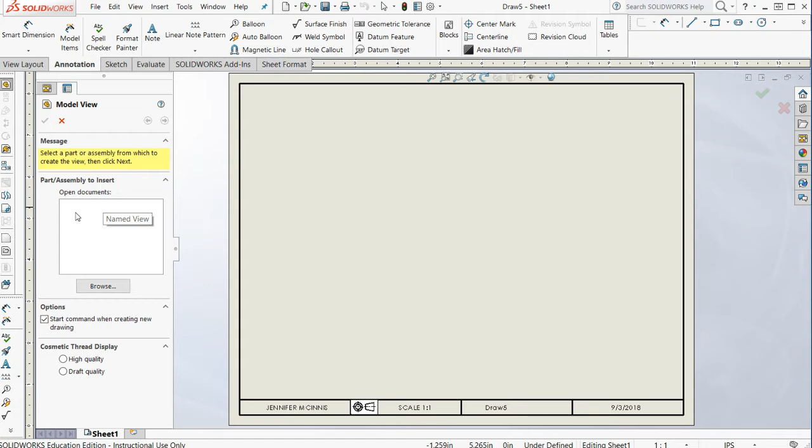It's an older sheet format, so it has my third angle projection note, but otherwise it's a pretty standard drawing template. So if you have your bearing part open, because you're doing this right after you finish the model, that would be in this window right here. If not, I'm going to browse, and I'm going to go find my bearing plate, and now I can put in these drawing views. So I'm going to put in my front view and a right side view, and I'm in projection mode, so I'm already going to just add in an isometric view at the same time.

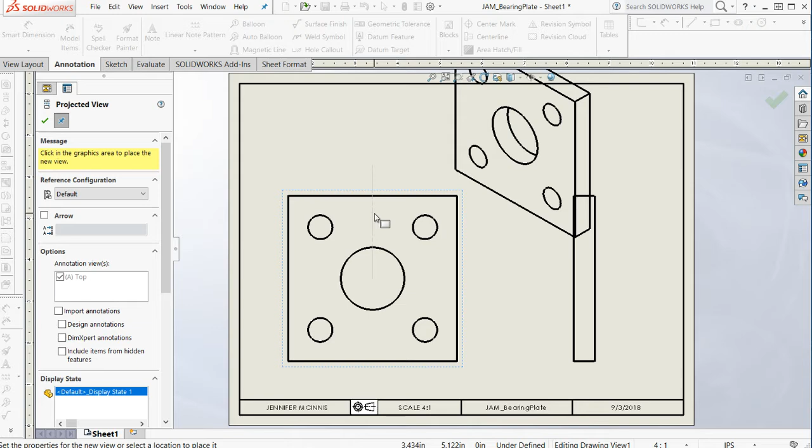Now the top view and the right view are nearly identical. They do not provide different information, so I'm not going to put in both. I'm just going to choose one of the secondary views. Check mark puts it in, or escape key finishes the tool, and I'm going to first off change my views. So this view is all right. It's a little big, but I think I'll have room for my dimensions, so I'll leave it. It's a scale of 4:1, so that should be okay. 2:1 is probably sufficient here as well. So that is up to you. There's no hard and fast rule about the scaling as long as it fits on the page.

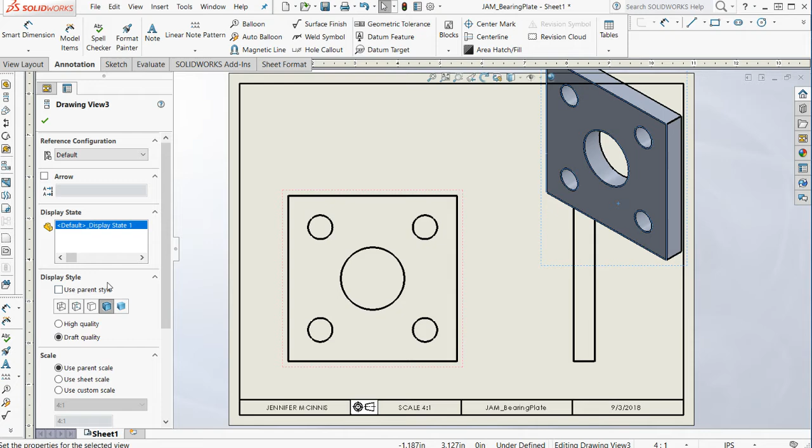This should be half of the scale of the front view. So I'm going to turn on shaded with edges on the left side. I selected the drawing view, and then these tools come up. I'm also going to use a custom scale and select 2:1 to shrink that drawing view to half size. Check mark closes those tools. And this just wants to settle right in that upper right hand corner. I notice there are no hidden lines to expect in this front view, but I should be able to see the through holes in my right view.

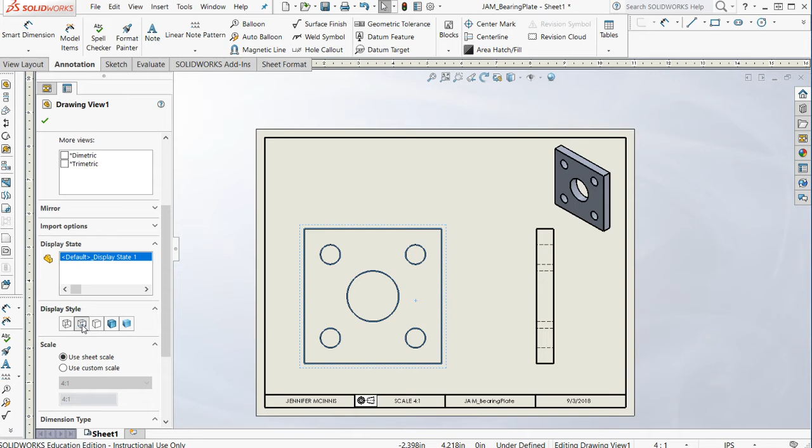So now I'll show you two things. So if my front view, which is the parent view, it's the first view I inserted, is the correct view, all of my drawing views will have that view. It should be a display style of hidden lines visible, not wireframe, because that makes all the hidden lines look like visible lines. But I want to be able to see where there are edges through the part. So this is showing me the holes, the edges of the holes, right?

Okay, so when I do a drawing, I have several steps. My first step is get the drawing view in. Seems intuitive, right? My second step is usually to add annotations that are not dimensions. So here I mean center lines, center marks, anything like that. So I'm going to start with my center mark, and I will highlight an issue we have because of our scale. SolidWorks scales center marks along with drawing views, which is, I think it might be my absolute top gripe about SolidWorks, is that center marks should not scale. I've never understood this one, so I will show you how we fix it.

When we turn on the center mark tool, all of these options come up. You have separate slot center mark options, you have manual insert options. I want to do a circular center mark because these are on a circular bolt hole pattern. So if I choose the circular option, I choose my holes in a circular manner, then my center mark is a circular one that indicates that bolt hole circle. I have to, however, turn off document defaults and divide by the scale. So I'm going to divide by 4 because my scale is 4:1, and that is a proper center mark.

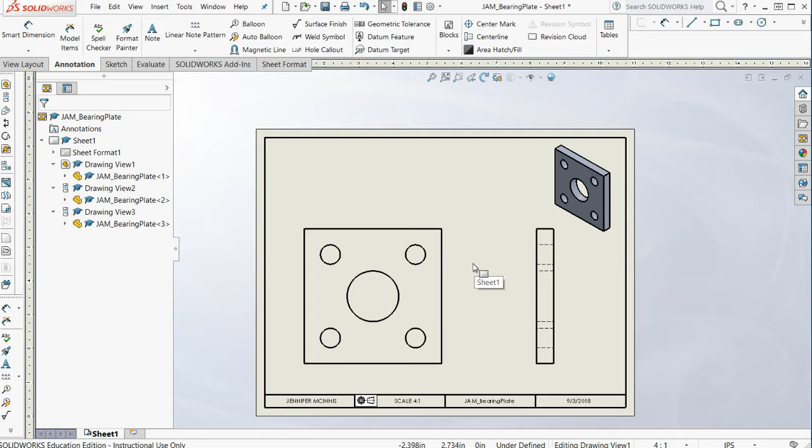Like I said, I don't know why. Oops, I forgot to hit check mark. Check mark puts it in, not escape. So let's do this one more time. Circular, around the circle we go.

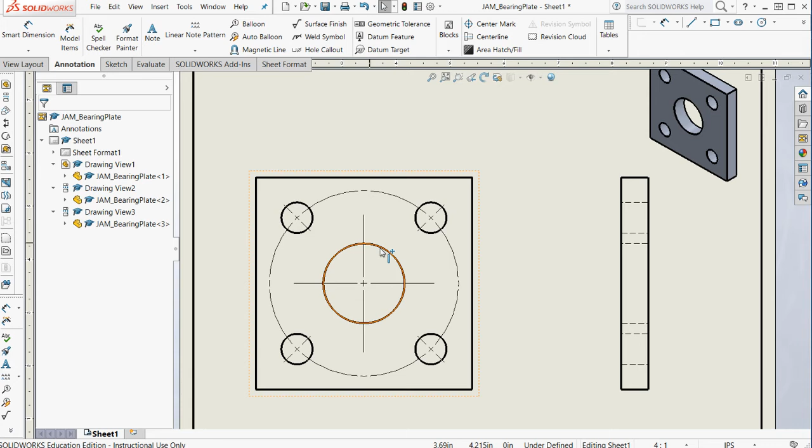And we turn off document defaults and we divide by 4. Check mark puts it in. So those center marks should be, I think it's 1/8 of an inch side to side or a 1/16 from the center out, and it should not scale with the drawing view. So that's our center marks. You'll notice it also included the center circle, which is perfect.

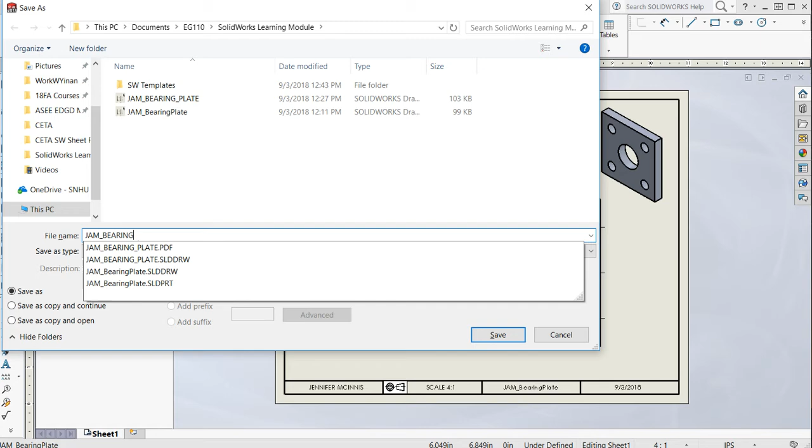And now I'm going to add center lines on these holes. I choose select view. I click on that view, and there are my center lines. Check mark puts it in. So now I'm going to give this a quick save. I already have one going, so we're going to do this bearing plate 2. Oops. I highly recommend all caps here. It updates down here, which is perfect.

Okay, so all of my annotations are in. It is time for dimensions. So let's look at a couple of ways we dimension these parts. Smart dimension is helpful. I can smart dimension by clicking on an edge and putting information out, or clicking out to the first standard positioning. I can also click on this circle and put in its diameter.

Okay. When I have dimensions, I can on the left modify the text. So for here, I can put for press fit as the hole dimension, and it doesn't change the link for the 0.375, but it does add the extra text. Another smart dimension I have here, I can indicate that this is, let's see, display as diameter. I can display the diameter of that bolt hole circle. I can line these up a little bit, and I could also indicate the thickness of the material. I know this is 1/8 inch material, but I need to indicate that somewhere.

The one that I can't do with a standard smart dimension is the 4-hole pattern. I'm going to put in a hole callout, and here is why I recommend using Hole Wizard anytime you would like to put in a hole that's associated with the hardware. It tells me the quantity, it tells me the depth, it tells me the diameter. If there was a countersink, a counterbore, or a thread, that information would be here as well. This is the absolute easiest way to indicate holes for hardware.

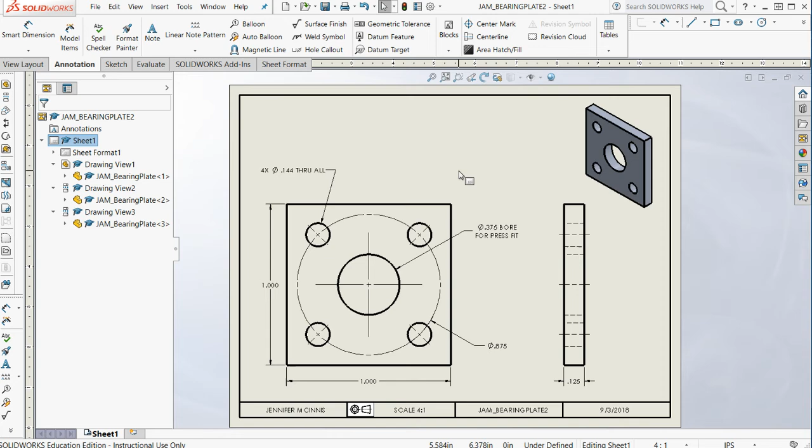That's ANSI standards. So as you read through the text chapter on dimensioning, there are standards for where dimensions go. There are standards for how tall dimensions are on the page. There are standards for the exact dimension and ratio of the height and width of the arrowhead. All of this is very precisely standardized by international governing bodies. So if it seems like I'm being picky, it's because I want you to understand those national standards that are absolutely critical in our industry. So that's the dimensioning aspect.

Final bit would be to put in a note. I usually like to include material. So here I need you to decide how you're making your part. Mine's going to be aluminum. Quantity, when you're making an assembly, how many of each part do you need? It's good to specify. Do you have an expected tolerance? So what we usually do is specify that 3 decimal dimensions are, and here I'll show you how to find that plus and minus.

Actually, I think I forgot a word, dimensions, plus or minus, and then I specify 5/1000ths of an inch is pretty standard. You might have a dimension or a particular feature that has to be even more precise, or perhaps is less precise, so that's up to you. 5/1000ths is a pretty good standard to hold, and we can certainly meet that in our machine shop.

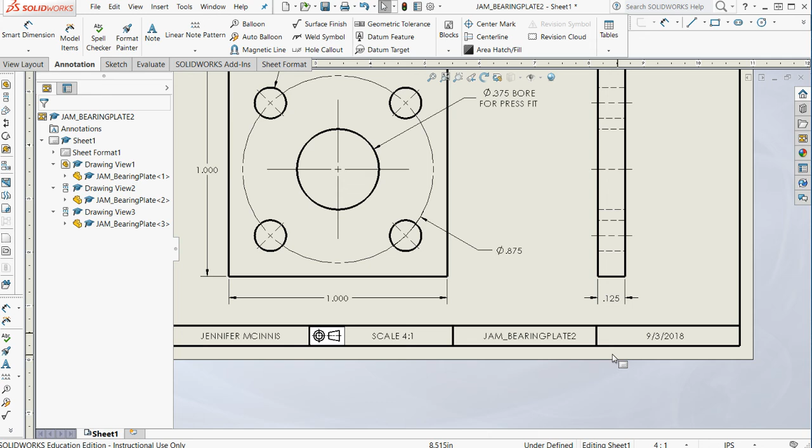Now, that's assuming it's aluminum from the machine shop. If you're 3D printing, I don't know what that tolerance is. Go investigate it. You tell me. What's a good tolerance? What's an expected tolerance on the 3D printers that we're using? Last step would be check that your name's there, check that the scale makes sense, check that it's a named part file, and check that it has a date. I save it, and then I also do a save as to get it into a universal format.

So here I'm going to warn you, if you send someone a drawing file without the part file, they can't see the drawing. I'll show you what that looks like in a follow-up video, just as an example, but know that I can't open drawing files that don't also have the part files. Also, if my standards are different on my computer, I will see what my standards say for your drawing, not what yours are. So PDF is the safest way, or eDrawing. Those are the two safest ways to share drawings amongst your peers, unless you're all working out of the same exact folder. So use caution with that.

And I think that wraps up how we do dimensioning in SolidWorks. This is actually a pretty complete view.